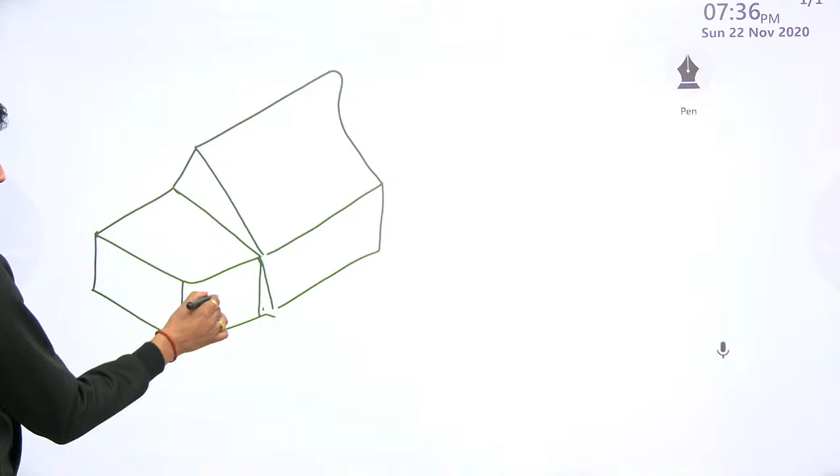Yes, this portion over here you call as side flank. This is your side flank, and this portion you call as end flank. This surface is what we call as rake face. This is the basic that all of you know. This is what is called as shank. Shank is the main body of the cutting tool, which is used to be held onto the tool post.

Now if you look at this tool, let us say this point over here is 0, this point there is 1, and this point over here is 2. 0-1 and 0-2 both are cutting edges. What are 0-1 and 0-2? Cutting edges.

During machining, let us say we are doing turning. So during turning operation, this whole thing is going to appear something like this. Let me choose the workpiece in some other color. I'll take red one. So let us say this is your workpiece which you are machining, you are turning basically, and then we have the tool here.

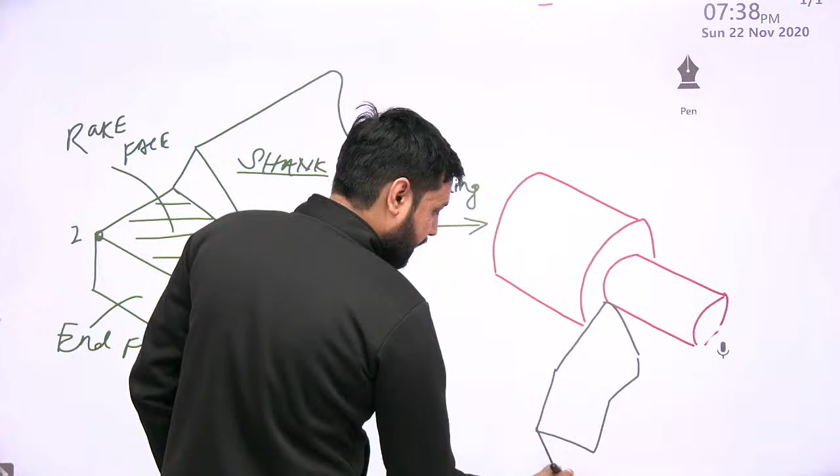Let me again choose another color. That color was this one. Let us see this one. Okay, so this is your tool, with the help of which you are machining the workpiece. So what happens, this workpiece rotates and you feed this tool.

Same tool is there. If you look at this point 0, then that point 0 is here. If you look at point 1 here, that point 1 goes like here, and this is point number 2. So now forget the right hand side. Concentrate on this diagram on the left hand side.

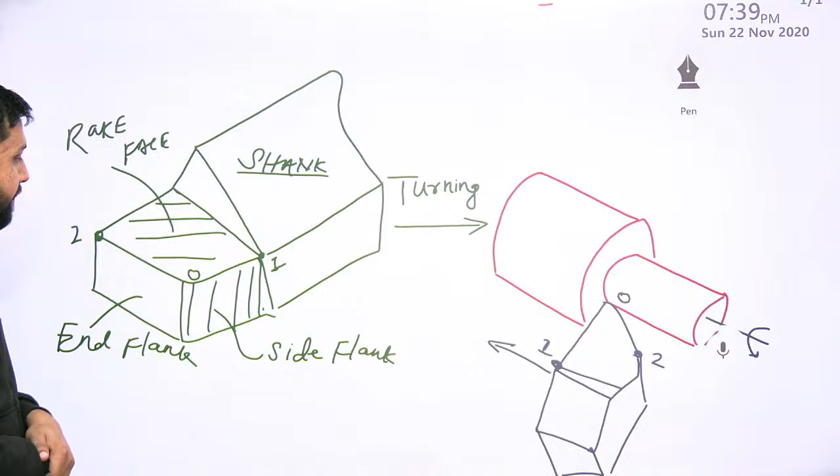0-1 and 0-2 both are cutting edges. If you look closely, you will understand 0-1 is at the side of the tool. So since 0-1 is at the side of the tool, we will call 0-1 the side cutting edge, and 0-2 is at the end of the tool. We will call it the end cutting edge.

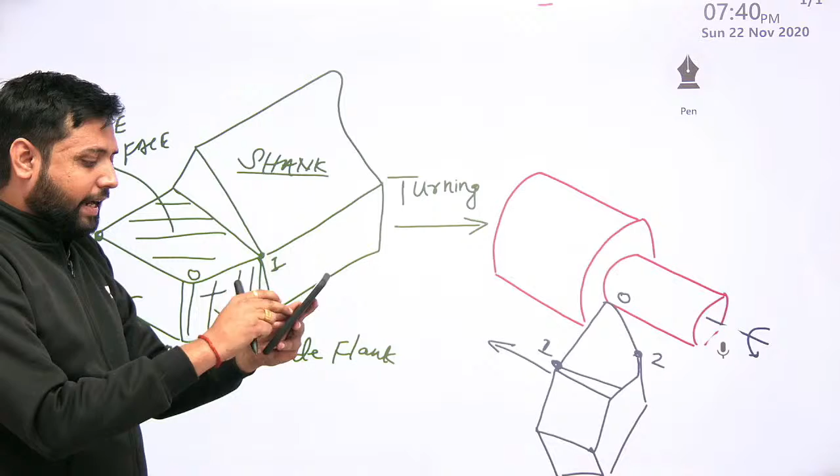Very simple to understand. And if you look at this diagram on the right hand side of the screen, 0-1 and 0-2: 0-1 is the side cutting edge, 0-2 is the end cutting edge. Primarily, out of 0-1 and 0-2, which one is in contact? Come into the live chat. Let me know, out of 0-1 and 0-2, which one is mainly machining the workpiece, mainly in contact with the workpiece?

Undoubtedly 0-1. So 0-1, which is the side cutting edge, is why it is also called the main cutting edge, primary cutting edge, principal cutting edge or major cutting edge.

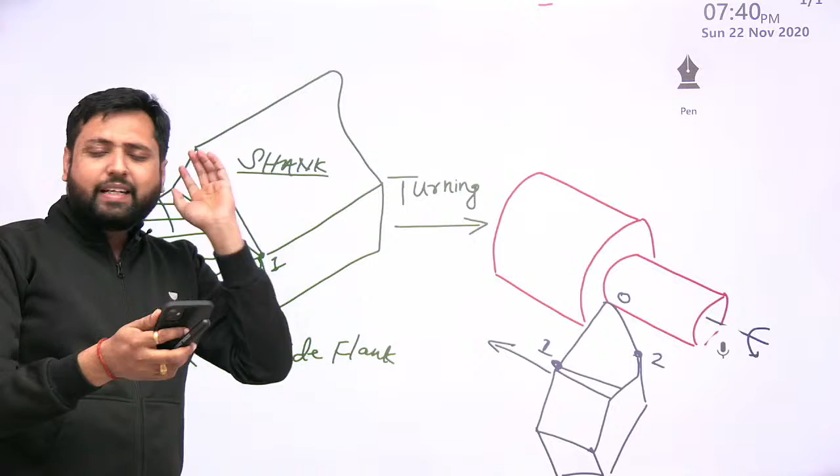What do you think? Is this end cutting edge in contact with the workpiece or not?

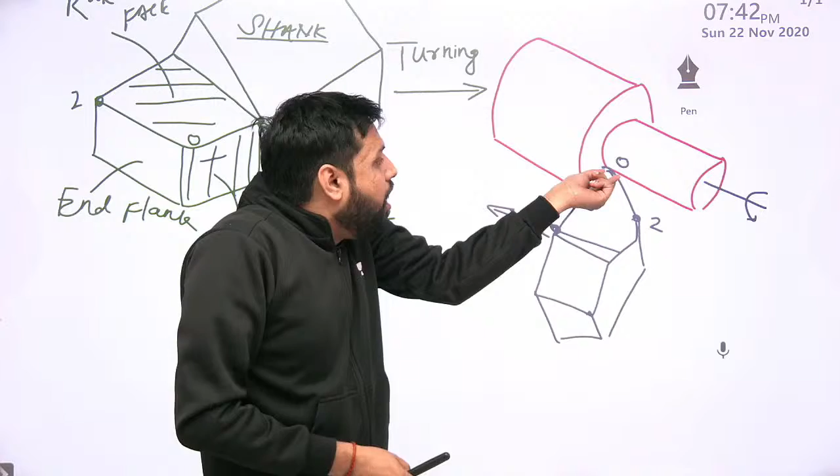This radius of curvature of the tip of the tool, which is also called the nose of the tool, is called the nose radius. And since you have made the provision of the nose radius, a small portion of the end cutting edge also comes in contact with the workpiece, but negligibly small. It has 2 cutting edges, but primarily only 1 cutting edge is machining the workpiece. So this is a single point cutting tool.

Now, my dear students, I defined 3 surfaces here in the tool. This was the rake face. This I told you is the side flank and this is the end flank. These two, one at the end and one over here, are both actually flank surfaces. This one is at the side of the tool, so side flank. This one is at the end of the tool, so end flank.

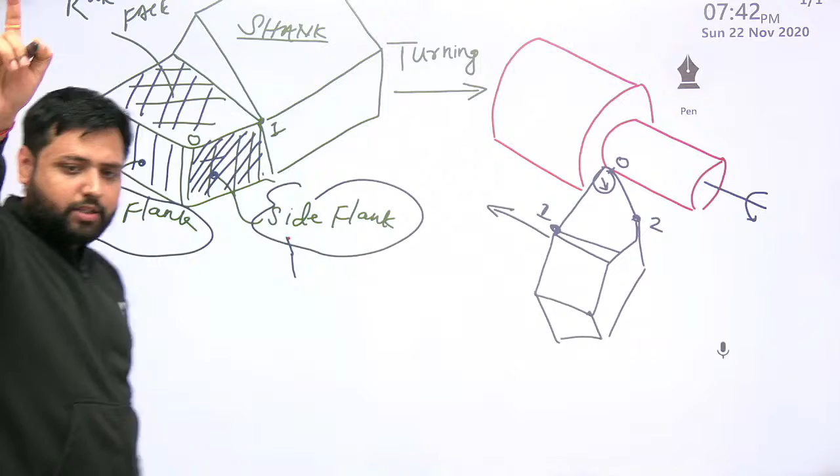Now, my dear students, if the machining has to happen effectively, efficiently, perfectly, then the chips which are coming out, look at this, the chips are coming out. I will show you the chips coming out from the workpiece here. Give me a minute. You see, chips are coming out.

As the chips are coming out from the workpiece during the machining, they will have a tendency to curl. It can curl in that direction as well as in this direction, like this.

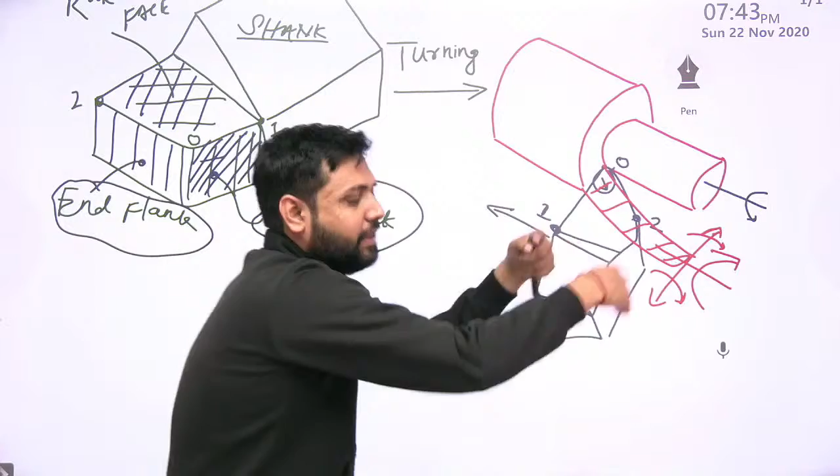Yes, dear student. Now, as it is curling, it may have a tendency to curl and enter in this gap. The gap you can see between the machined surface and below point 2. Below point 2, you have this end flank. That is not visible there, later on I will show you. But below point 2 the end flank is there, and this is nothing but the machined surface. So that chip can go and enter into that gap. That gap is very small.

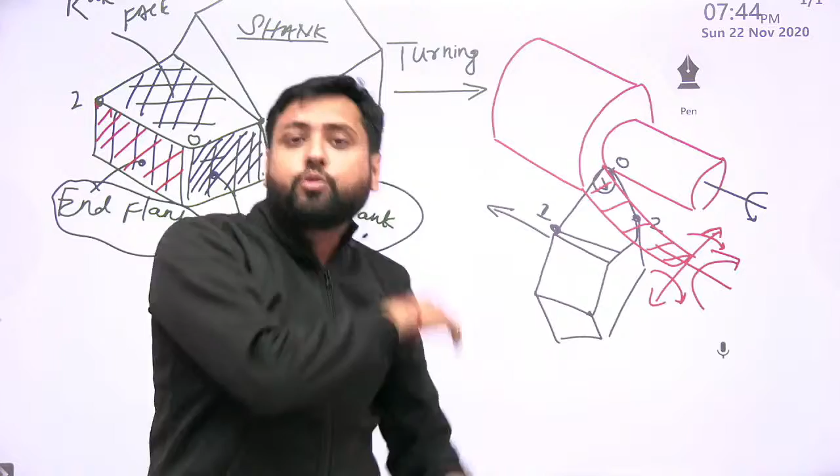If the chip enters, it will rub against the end flank of the tool. It will rub against the machined surface. What will be the result? It will deteriorate the surface finish. It will rub against the flank surface of the tool. It will reduce the tool life by wearing that end flank surface. That should not happen. So chips will curl, but it is our responsibility that we will make them flow away from the machining zone.

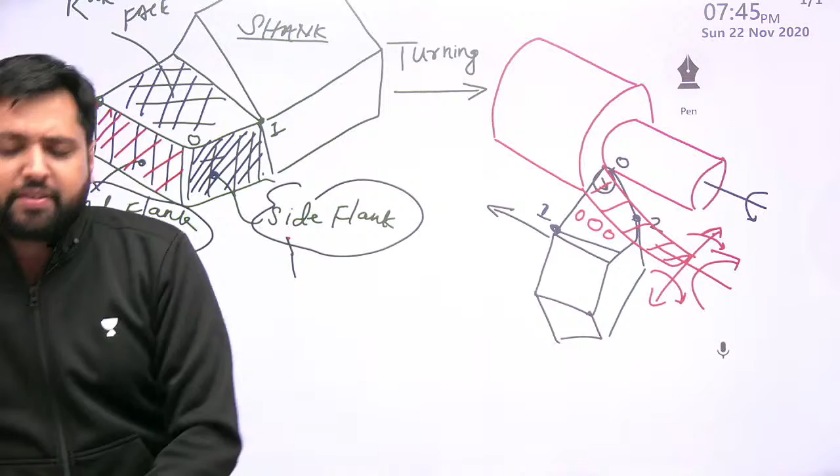Are you getting this? So that is the reason why this surface upon which the chip is flowing, which you can easily understand is the rake face, this rake face of the tool is given certain slopes, certain inclinations, so that the chips flow away from machining. That you will have to assure if you want to do the machining perfectly, efficiently and effectively.

Not only that, let me show you. Let me move it, or I'll just erase it. And I'll show you another diagram so that many other things will be clear to you. Basics are very important in metal cutting. Formula rat ke kuch nahi hoga. Basics are very important in metal cutting, my dear, because competition is increasing on a daily basis.

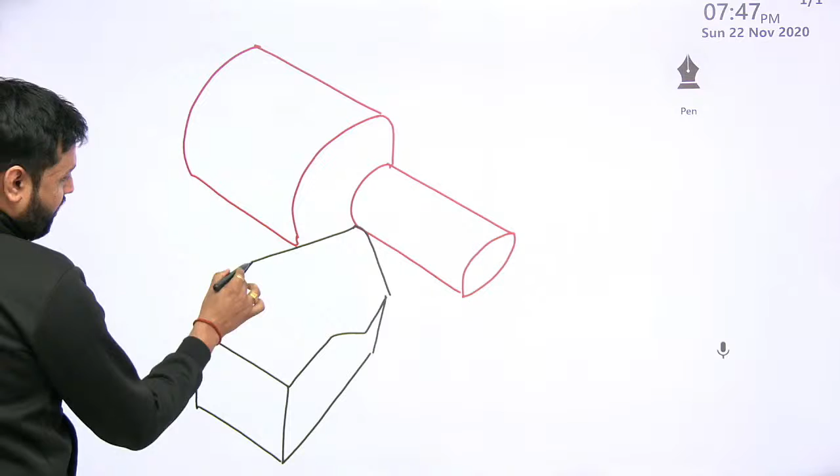Let us take the tool in a somewhat different color. Just a minute. This is your tool. Look at this beautiful tool. This is the beauty of metal cutting that you are looking at. Beauty must be appreciated. You must appreciate this beautiful diagram.

Right now, I am showing you the surface which is below point 1. Look at this 3-dimensional diagram. What is that surface? Side flank. What is that surface? Side flank.

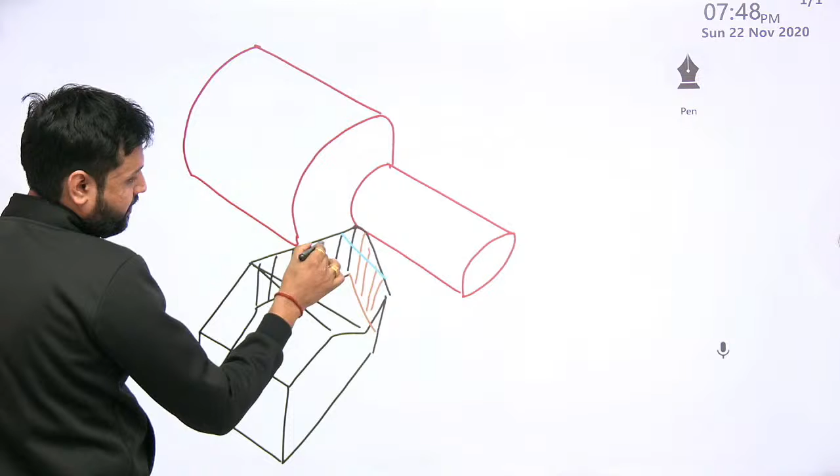Look at this surface. What is that? Down there, the vertical surface. End flank. And on the top, let us choose green color. This surface on the top is your rake face. Down there, black color, side flank. Orange color, end flank. And on top, green color, your rake face. The rake face was sloped, given certain inclinations, to assure that the chips flow away from the machining zone.

But not only that, my dear students. The side flank and the end flank, the black one and the orange one, also need to be given certain inclinations, certain slopes.

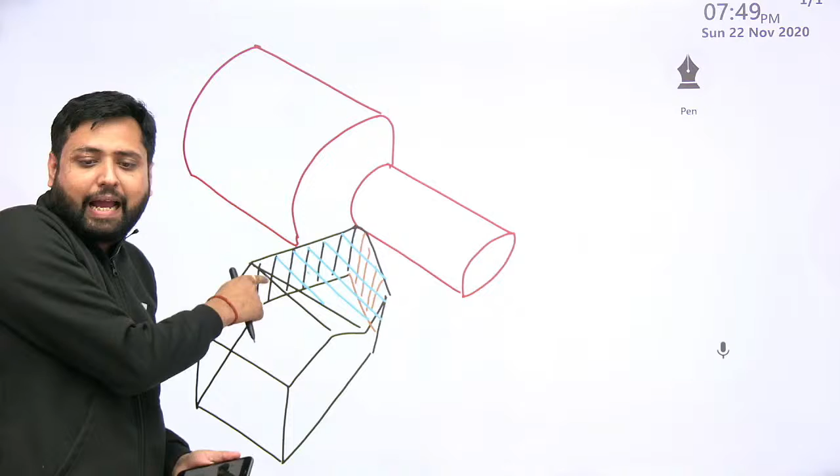Undoubtedly, if you are doing machining, only the cutting edge should come in contact with the workpiece. Flank surfaces, that black color one and that orange color one, both these surfaces must be relieved from the workpiece. If they are not relieved from the workpiece, they will start rubbing against the workpiece. Very nice. I can see your answers there in the chat box. Very nice. Yes, to avoid rubbing, these surfaces should also be given certain number of slopes.

So by now it is clear that to assure that the machining happens effectively, efficiently, chips must flow away from the machining zone. Only the cutting edge should be exposed to the workpiece, and there must not be any contact between tool and workpiece along the flank surfaces. And to assure that, what are we doing? We are sloping, we are inclining all the surfaces, whether rake face, side flank or end flank,

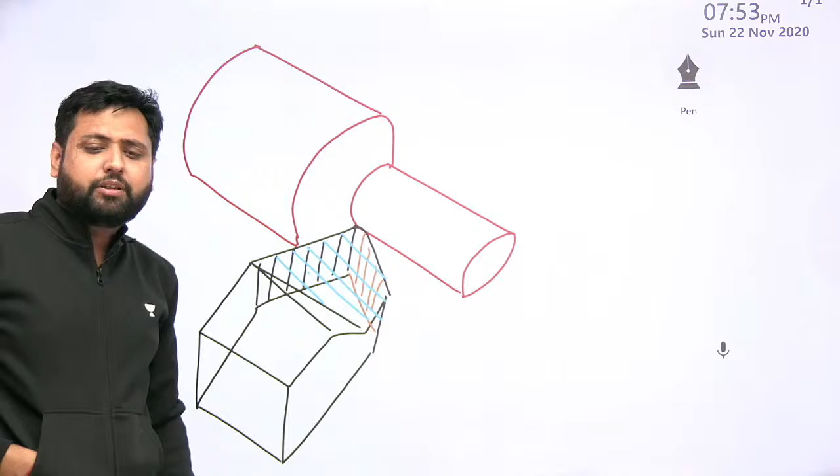How many surfaces are there? 3 surfaces are there. Every single surface can be given 2 slopes. So in total 3 surfaces, every surface can be given 2 slopes. How many different angles will be there? Undoubtedly 3 surfaces, each of the surface can be given maximum 2 slopes, so maximum number of angles total will be 6.

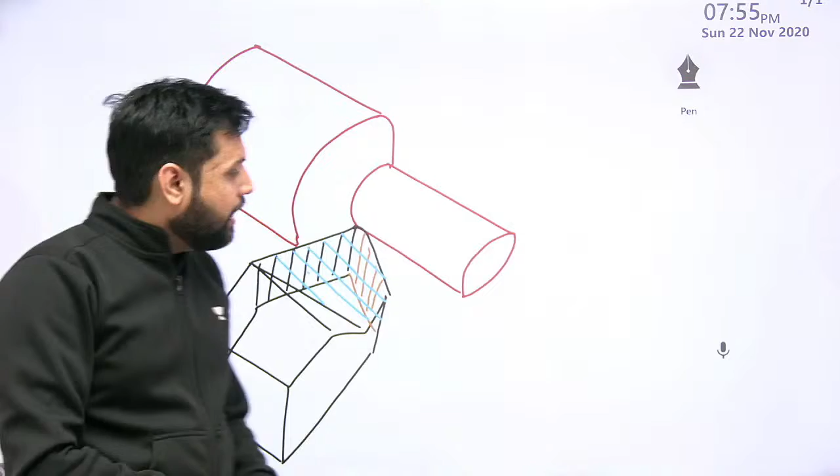Now comes that you know that there is tool signature, 7 components, and as I think most of you somewhere studied, there are different types of tool signature systems.

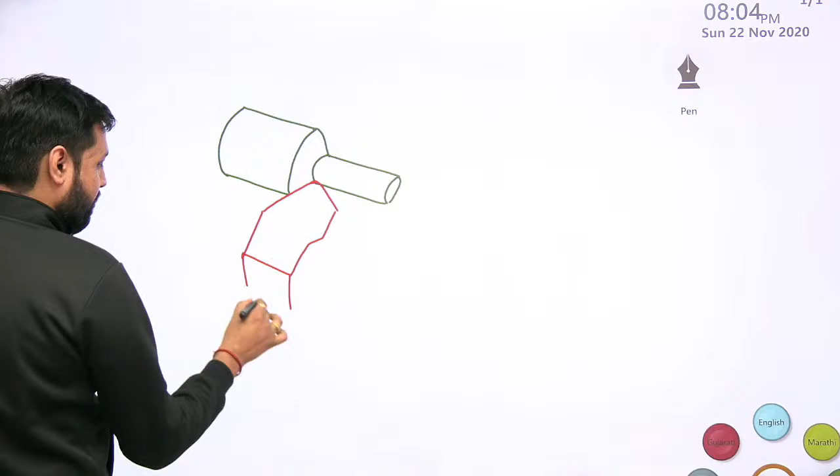Yes, and especially that beauty gets enhanced when it is explained by Mr. Rajeev Singh, who is the plus educator on Unacademy platform.

Yes, let me choose another color. This is a workpiece, this is a tool. Now, let us look at this. This is your machine.

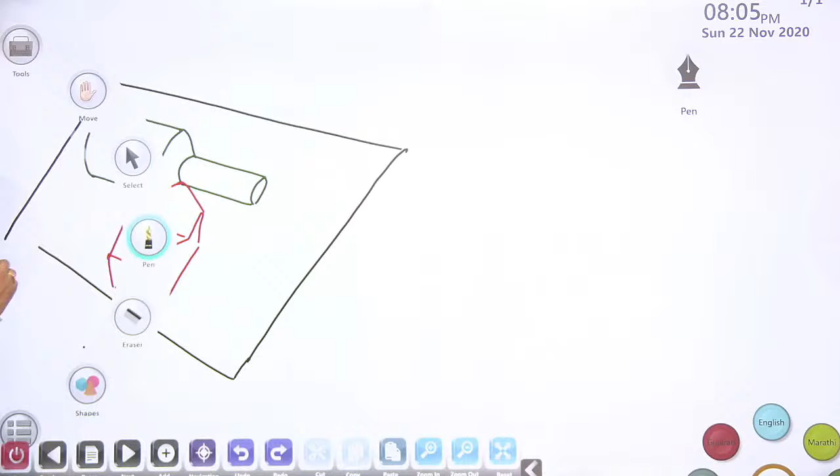Let me take another page itself. Leave it, otherwise you keep playing. This is our workpiece. This is your tool.

And here, let us say, we have this machine. It will not let me explain this interface, I think. But hold on. I will reduce the magnification. Is it magnified? Zoom out, zoom in, zoom out, zoom out.

Yes. Oh, thanks, dear. Thanks a lot. You are great, man. Thanks a lot. Chalo. You found the problem, right?

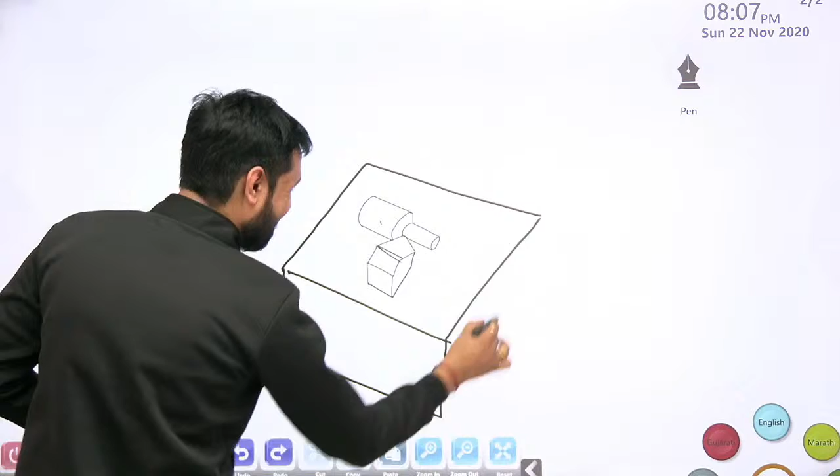What was going on? Let me zoom it further out. Oh, great. That's looking great. This is your machine. Is it visible to you now? Because I have zoomed it out. This side is headstock. This side is tailstock. Yes, this side, this is headstock. This side, this is your tailstock.

Now, here there is a line joining the headstock and the tailstock. And you know what line is that? This is that line joining this headstock with tailstock. Let us say that line joining headstock and tailstock, this red color one, is your x-axis.

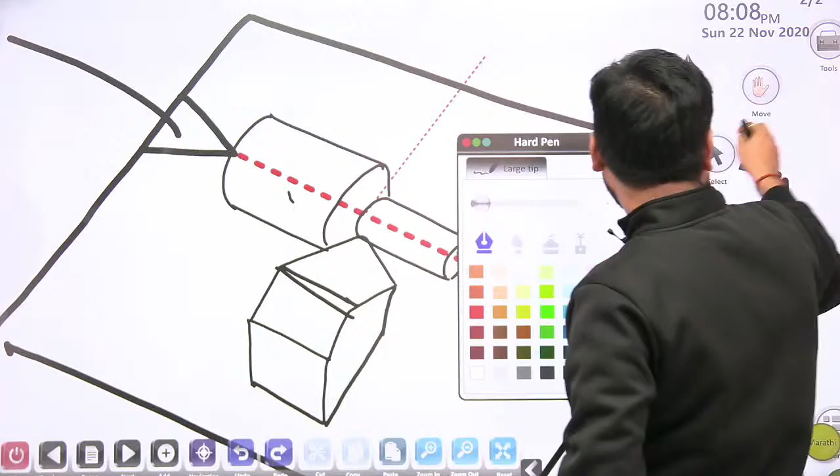Then perpendicular to that, we have another one, that is your y-axis. And where is that? Let me say here. This is your y-axis. Fine. And then we have another axis here, that is your z-axis. Let me show that as well. Let me take the shapes, that will look beautiful. Yes, here this is your z-axis. Yes, here somewhere there. Great.

And thanks, Global. Awesome. You are one of my previous students from ABD. ABD means, is it Abbots? ABD, I think Ahmedabad. Oh, sorry, Ahmedabad. Okay, got it, got it.

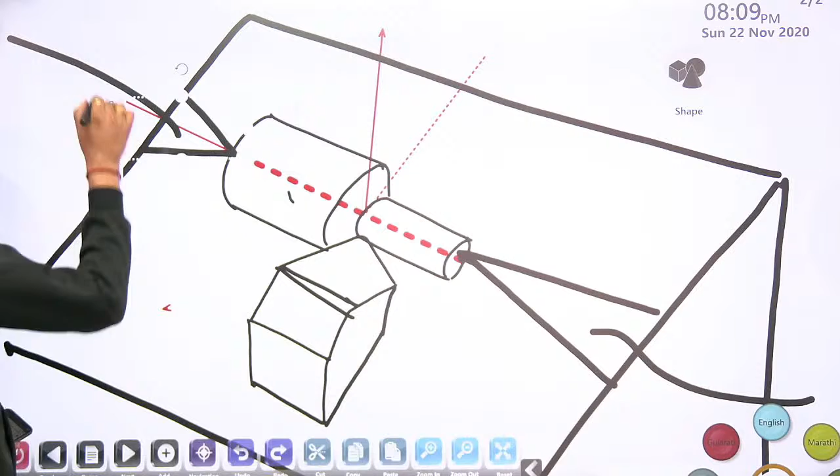So this is your x-axis here. I'm sorry. Undo. Yes, here it is your x-axis, and there we have the y-axis, and this I told is the z-axis. Now let me take the pen. I am actually using this interface for the very first time. So see, this is your x-axis, this is your y-axis, and this is your z-axis. Yes, and these are the axes of the machine.

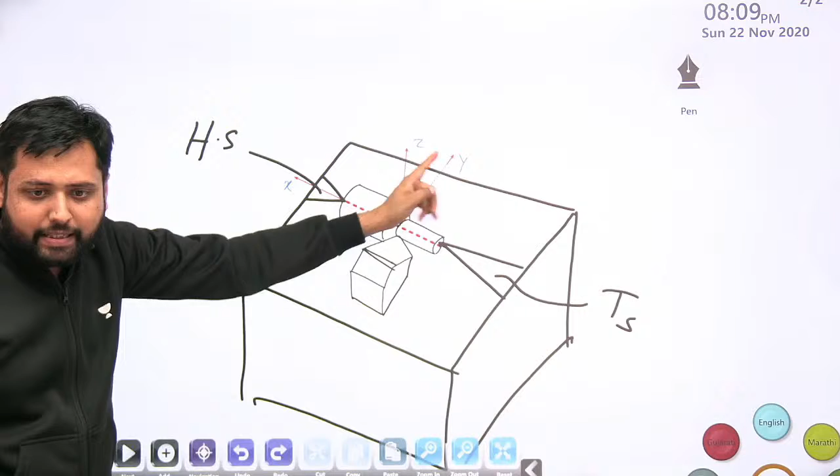Look at this. Let me zoom it out. Tailstock, headstock joining, x-axis; perpendicular to that, y-axis; and perpendicular to both of them is your z-axis. Now let me zoom in further. Great. Now look at this. We have a few planes here. Let me show you. Keep in mind that these are the axes of the machine. Let me show you the planes here. I will have to take care of the colors, then only it will be better visible to you.

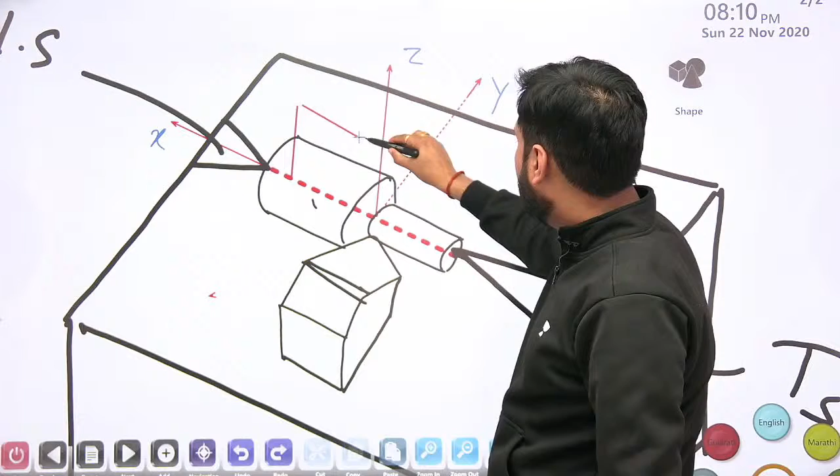Yes, here we have this plane, and its orientation is along, undoubtedly, the x-axis. Look at this plane. Its orientation is along x-axis. There is another plane that we have here. Let me change the color, then only you will be able to visualize it in a better way. Just a minute. I have to be very cautious while choosing the color, because a few colors don't appear that well.

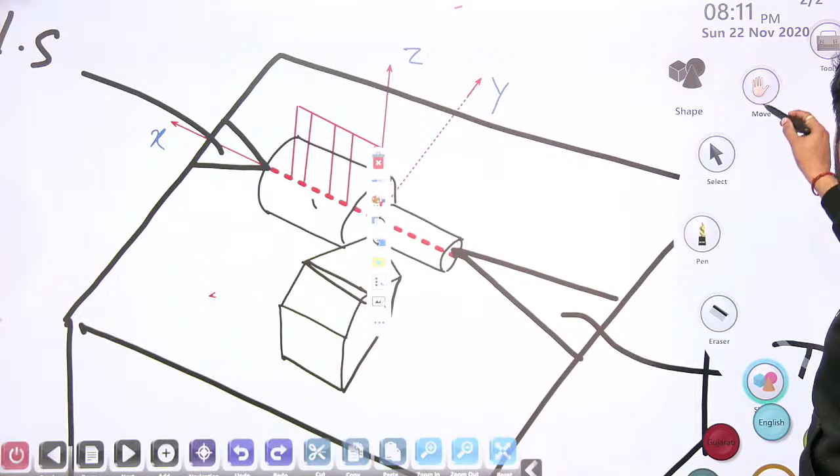Okay, there is another plane. Oh, still it is red. Why? Just a minute, hold on. And now comes the shapes. This one. Just a minute, I got it. Shapes and color. Yes, from here I take. This is the other plane. Look at that plane. Its orientation is along y-axis.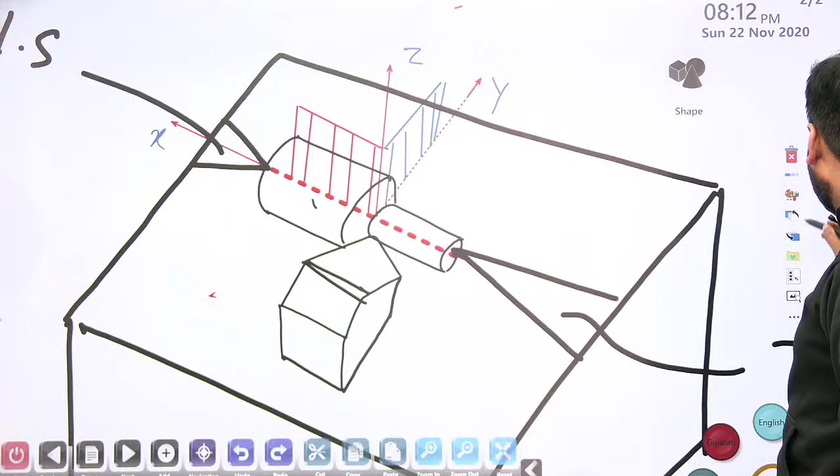And then we have another plane here. Look at this plane. This one. Look at this plane, look at that plane, and look at that plane as well. Now let me take the pen. Shapes ka tension khatam.

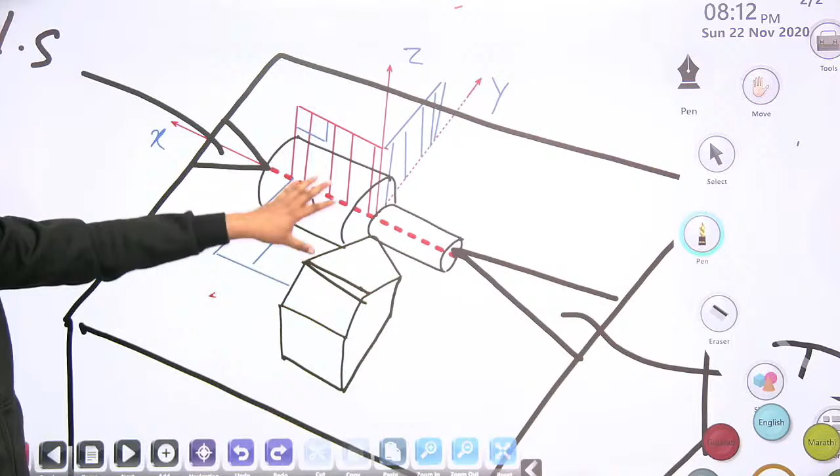If x, y, and z are the axes of the machine, then undoubtedly the planes drawn with the help of these axes will be the planes of the machine. Now, this red plane here has its orientation along the x-axis. So that plane we identify as the pi x plane, and we name it the longitudinal plane, because it is in the longitudinal direction.

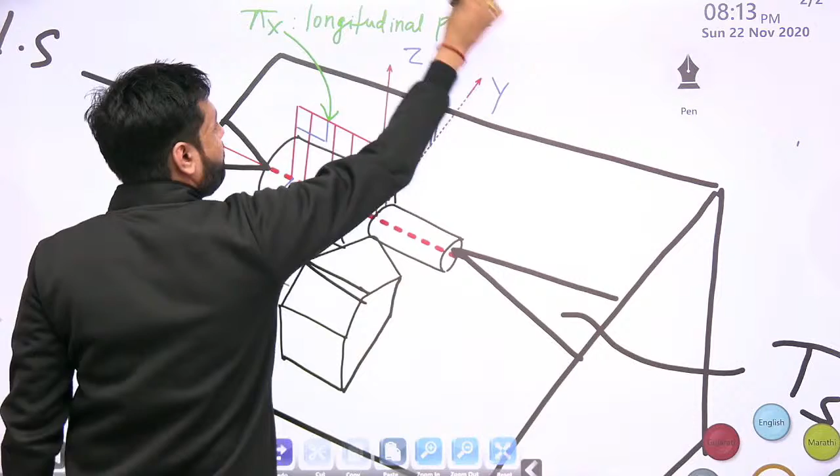And then this blue color plane, look at this plane. This plane we name the pi y plane, because its orientation is along pi y, along the transverse direction. So we name it the transverse plane.

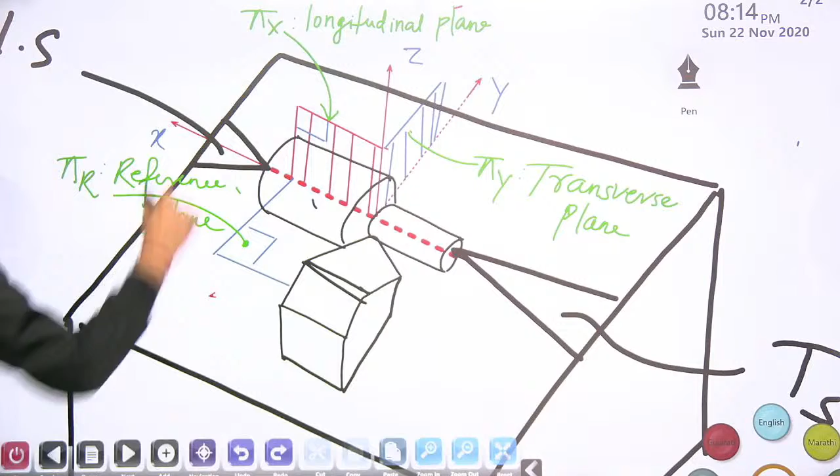Yes, this is the basic thing that you need to understand if you want to solve all the questions, whichever question they ask. And this plane over here, you look at that plane, this is what we call pi r. Pi r stands for reference plane. Okay, so these planes: red color one longitudinal plane, blue color one transverse plane, and down here this horizontal plane is the reference plane. Now look at this tool carefully.

Look at this tool further very much carefully. You know what surface is that? Side flank. Yes. And what surface is this? Let me show you with another color. What surface is this? End flank. And on the top, let me show you with another color. What surface is this one? Here. What surface is this? Rake face. Yes, red color one is the rake face, this green color one is the side flank, and the purple one is the end flank.

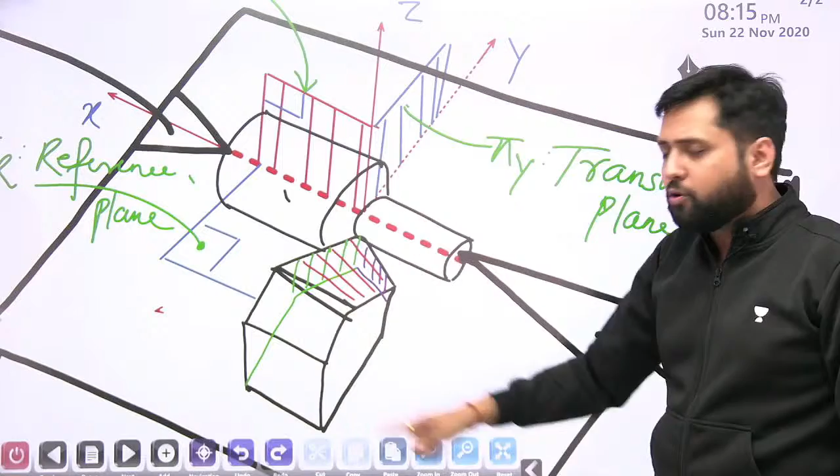And you know, you have sloped them so that chips flow away from the machining zone, so that the flank surfaces do not come in contact with the workpiece, right? Now my dear student, the side flank, if you slope it, look at this diagram, you will slope it towards me or away from me? Undoubtedly towards me. Then only it will not rub against the workpiece surface. The end flank, in which direction? Slope towards yourself. Yes, if you slope it towards the machined surface, it will start rubbing with the machined surface, right? Yes.

So there are these slopes, and if the angles are there, tell me approximately what angle? What is the angle of the line or plane that I have drawn? Few of you may say 20 degree, 25 degree, 30, 40, 45 degree, anything. But that will not be correct until you ask me, sir, with respect to what? With respect to this it might be 40 degree, and with respect to that, this will become 90 degree. So whenever you measure some angle, you measure it with respect to a plane. That is one thing.

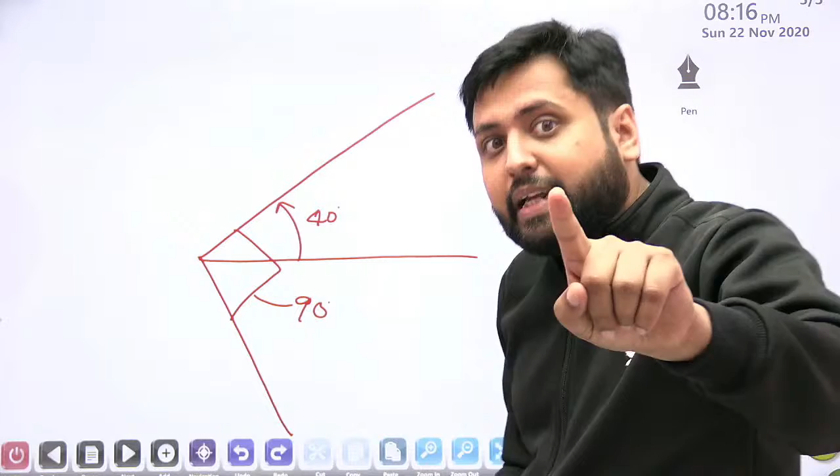The another important thing is, in which plane are you measuring this angle? This 40 degree, undoubtedly you are measuring it with respect to this plane. But in which plane? This angle is being measured in the plane of this smart board. This 90 degree angle is being measured in which plane? The plane of this white screen. Isn't it, my dear student?

Yes. So both of these things are very important, and especially while understanding the tool angles, the second one becomes very much important: in which plane are you measuring? That is the game due to which there are different types of tool signature systems. So whenever you measure some angle, you measure it with respect to some plane and into some plane.

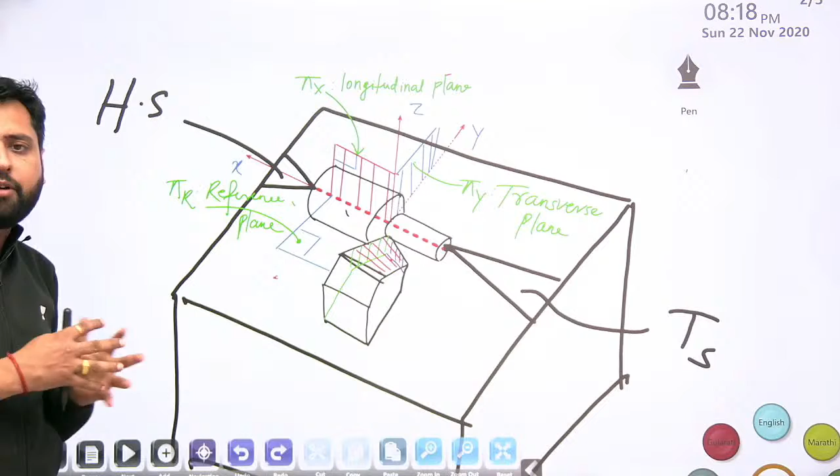Now listen, my dear students. Look at this. Here these are the three planes: reference plane, longitudinal plane, and the transverse plane. Now, listen to me carefully. All these three surfaces, rake face, side flank and end flank, have certain inclinations, certain slopes. Those inclinations will be measured with respect to some plane, and in some plane.

In the ASA system, those angles of the three surfaces are measured with respect to and in any one of these planes: reference plane, longitudinal plane, transverse plane. And these are the planes of the machine. That's why it is said that the ASA tool signature system is based on the machine reference system. Is it clear to all of you?

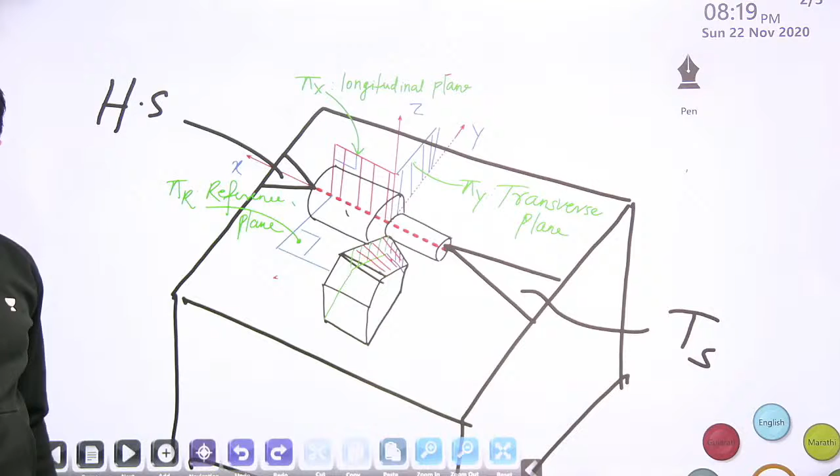Now, come back. Let us bring all these planes onto the cutting edge of the tool. That's what I am going to do. Look at this. Let me add a new slide, and there I will bring all these planes to the cutting edge of the tool, and then you will understand the whole ASA tool signature. You see, this is your tool. Okay, later on I will erase them, don't worry. This is your tool.

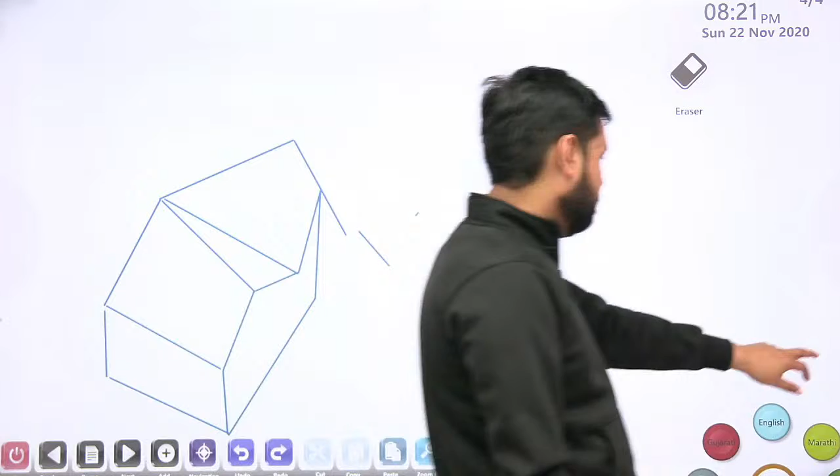Eraser has to work. Oof. Let me cut it. Cut option is not there. Hold on.

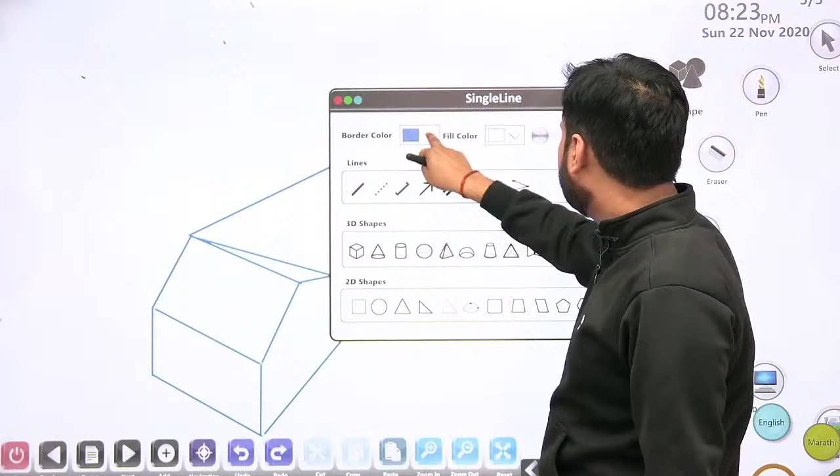Okay, this is your tool. Let us say. Now dear, we have few planes here. Yes, those planes are three planes that I had shown you earlier. Those three planes are, one was the red color plane in the x-axis direction. Yes, let us say this is the x-axis direction.

So here there is a plane. There is the z-axis. Then we have the y-axis as well here. Yes, come on. So there is the plane. This plane is the longitudinal plane. Yes, this plane here is the longitudinal plane, pi x.

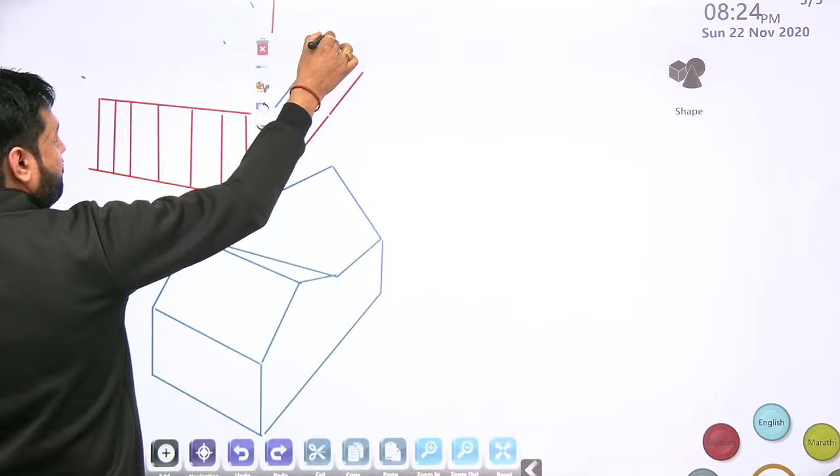And there is another plane. Let me choose another color for that. There is another plane. Yes, and let me extend this as well. Here in this direction. Okay, we have this plane here extending in this direction like this.

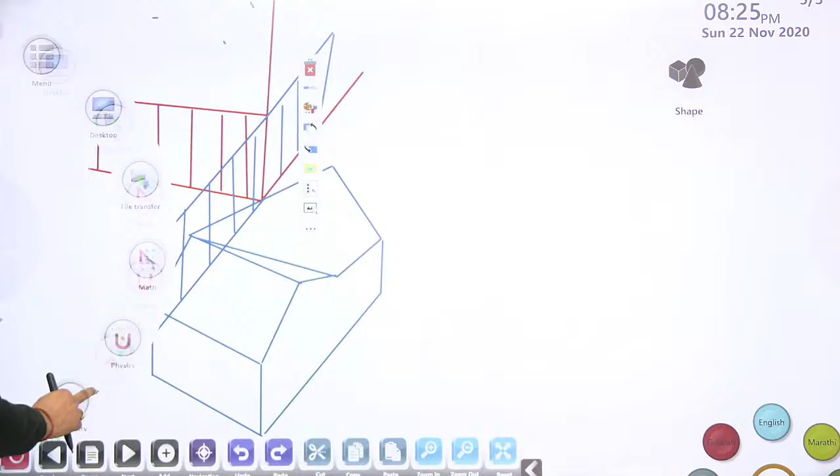Okay, this is the plane. Yes, I hope it is clearly visible to you. Yes, it is. And then we have another plane here. Where did it go? Here. Here, yes. We have another plane here.

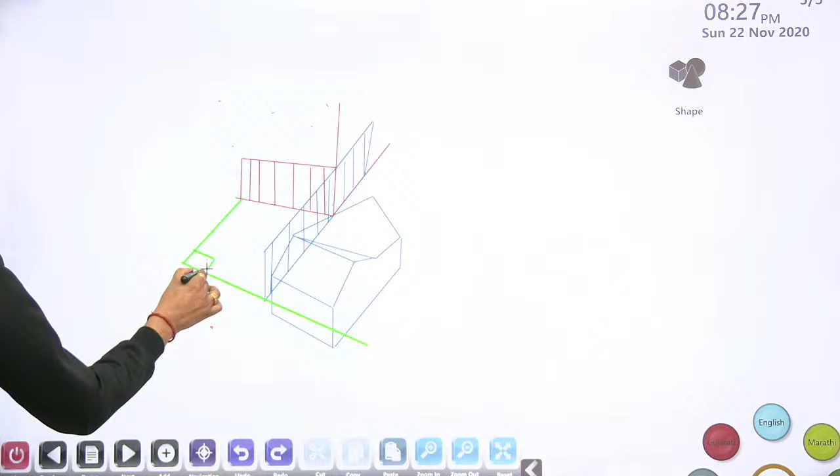Zoom out this. Yes, there is another plane here. This one. Three planes are there. Yes. This is your reference plane.

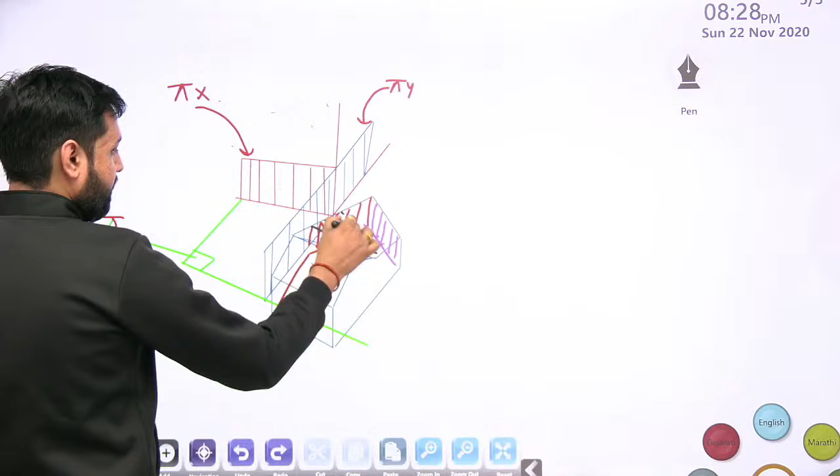We are going to measure the inclinations of all these surfaces. Black color one rake face, purple color one end flank and side flank, with these three planes, which are pi x, pi y and pi r. Yes, remember this. What I have done is I have already explained.

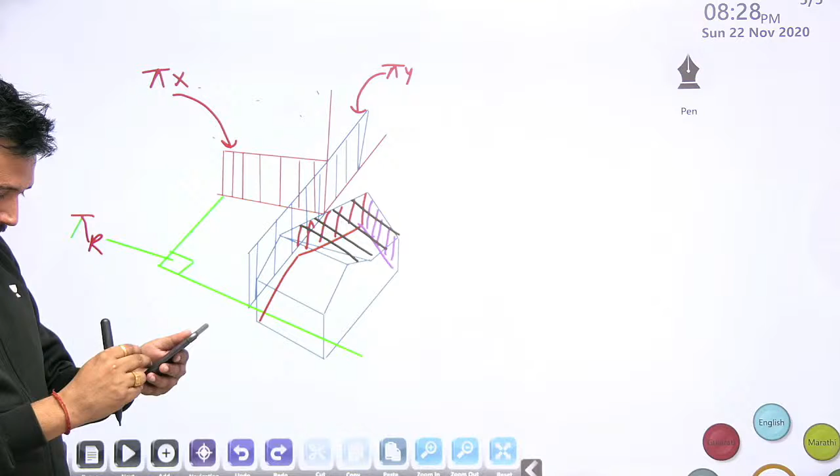Right now I am in Patna. Okay, Ravi Raj has already completed casting, forming, welding, machining from my lectures. Hi guys and good evening sir. Yeah, good evening to all of you. I didn't see the comments for long hours. Let me see what is going on. Jhama Jham is going on. Great. Ravi Raj complete. Ravi Raj, you can WhatsApp me, yeah? Okay. You are from India, Darjeeling. Stay well because it's winter time, right?

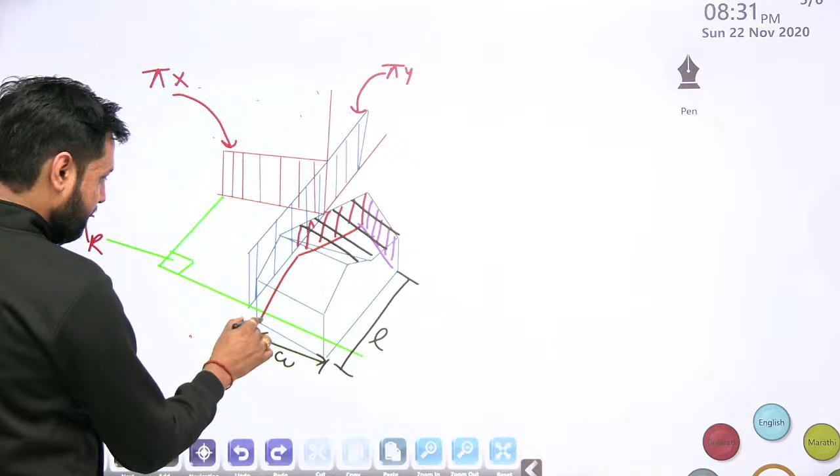Now come to the next diagram here. This is the width of the tool, this is the length of the tool, and down there we have this as the base of the tool.

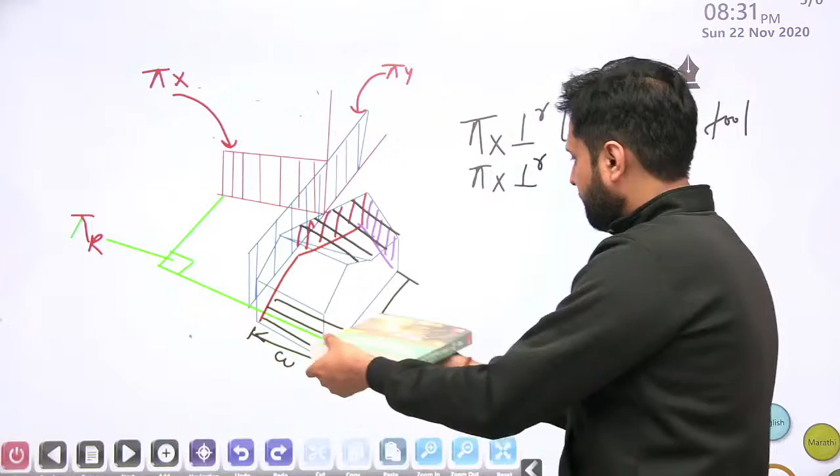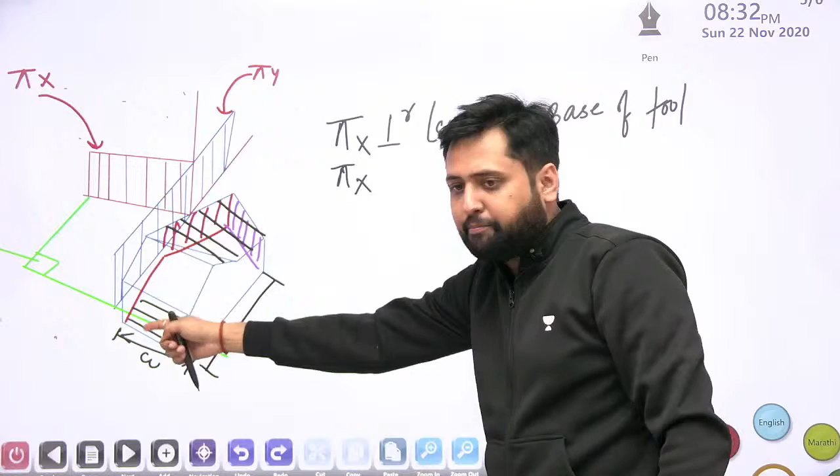Yes, so pi x is not only perpendicular to the length of the tool, but it is also perpendicular to length and base of the tool. Yes, then if you look at pi x plane, it is parallel to the width of the tool. Yes, pi x plane is parallel to the width of the tool.

Second thing, understand pi y. Look at pi y. What is pi y? This one is pi y, right? Pi y is perpendicular to width of the tool. Pi y is perpendicular to the width of the tool as well as perpendicular to the base of the tool.

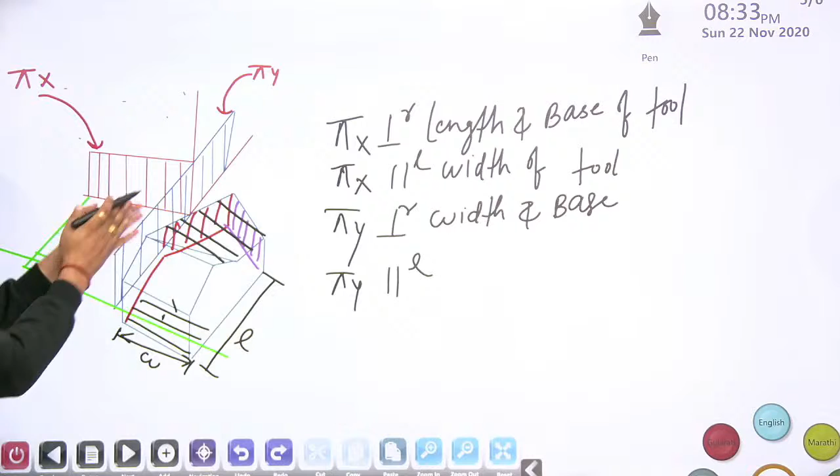Yes, pi y is perpendicular to both width and base of the tool. Yes, and pi y is also parallel to length of the tool. Yes, now I am just about to give you the Brahmastra.

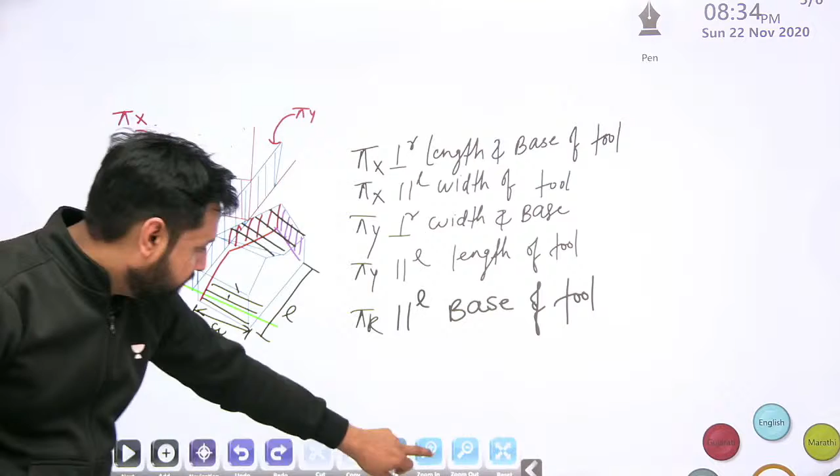Pi r, this is the reference plane, pi r. Let me zoom it out. This is the reference plane. Yes, pi r. This pi r is like parallel to base of the tool. Now, dear students, this you understood very well. Let me move to the next slide here and just hold on.

What angles do we have? ASA angles. The ASA angles that we have are alpha B, back rake angle, side rake angle, end relief angle, side relief angle, end cutting edge angle, and side cutting edge angle. Right, dear students?

These are the angles. Now, if these angles are there, undoubtedly they will be measured with respect to some plane, and not only that, they are being measured in some plane. That's what you need to understand, and that's what you need to even remember, my dear students.

You see, these are the angles measured with respect to and measured in. That's what we have to understand and remember. To understand, you can go to YouTube and search ASA tool signature part 1, part 2, part 3, part 4, part 5, Rajeev Singh, and you will get it. I have explained it beautifully over there. I will not waste the time over here. I'll just give you the direct Brahmastra.

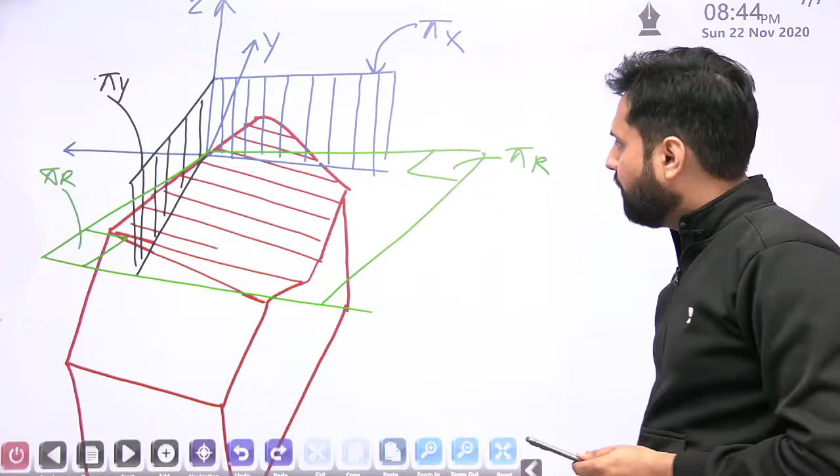in backward direction, how much is this angle? Let me show you. In backward direction, if you measure, how much is the angle? You see, this is the angle in the backward direction. Which color will be suitable there? I think this will be visible to you. Yes, I think this will be visible to you. You see,

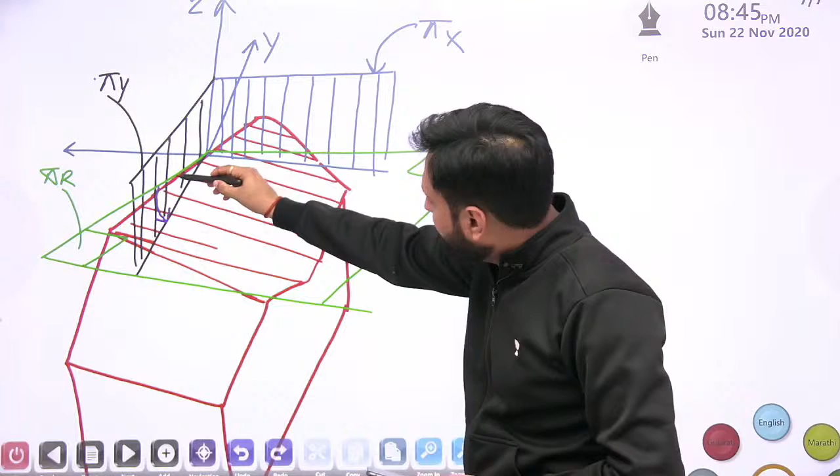This angle from here to here, this angle is what we call as back rake angle. Now, back rake angle is being measured with respect to which plane? You see, pi r plane. And this measurement that you are doing, that measurement is being done in which plane? You see, in this black color plane, that is pi y plane. Did you understand? With respect to pi r, in pi y. Yes, my dear.

So that is why I wrote here, look at this, back rake angle is measured with respect to reference plane and in pi y plane. Okay? Or in words, how do we define this back rake angle? It is the angle of inclination of the rake face measured with respect to a plane which is parallel to the base of the tool, and it is measured in a plane which is parallel to the length of the tool but perpendicular to the base and width of the tool. Did you understand anything? No.

You know what did I say? Now let me tell you this slowly. Listen to me carefully. I told you that back rake angle is the angle of inclination measured with respect to a plane which is parallel to the base of the tool, and it is measured in a plane which is parallel to the length of the tool but perpendicular to the width and base of the tool. That is what I said to you.

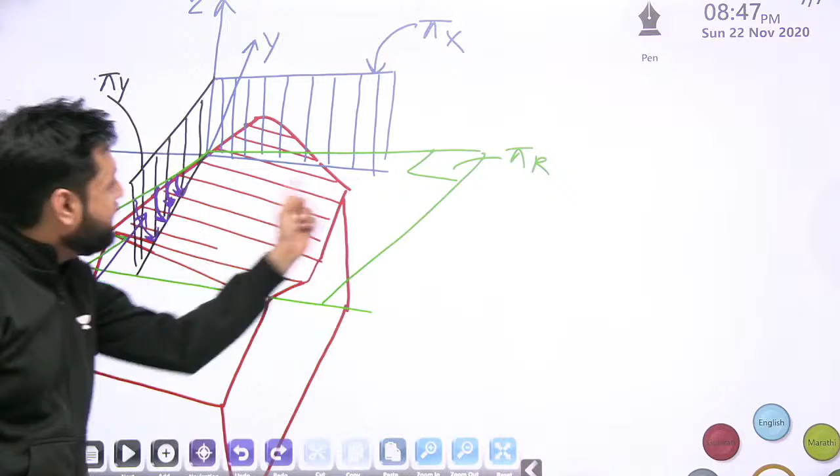So if you try to remember this in words, you will never be able to do that. But if you understand this along with this, then you can easily remember. Though if you don't understand, then I will give you a trick. This is how all the angles are defined. You see, the rake face in this direction is having the sideward inclination, so that angle will be your side rake angle.

That angle is measured with respect to which plane? This from here to there, this is the angle. This angle is showing you the sideward slope of the rake face with respect to what? Reference plane, pi r. That's what I wrote here, with respect to pi r, reference plane.

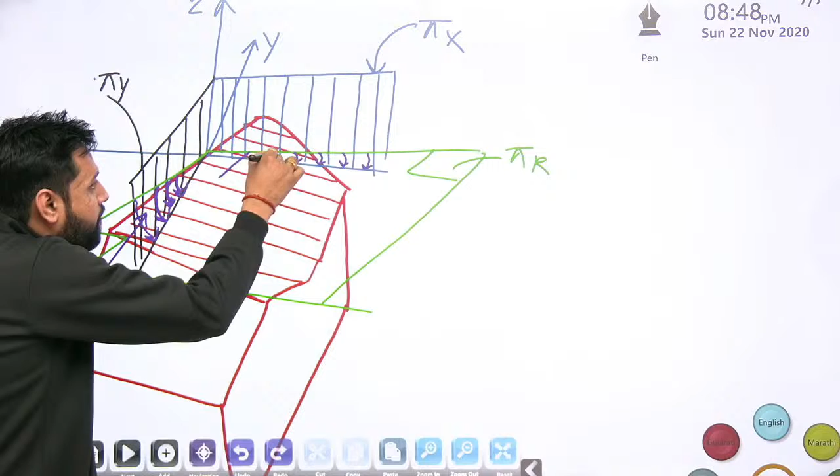And this measurement that you are doing, from here up to this angle, in which plane? Undoubtedly you are doing this in the pi x plane. That's why I wrote here that this angle is measured with respect to reference plane, but it is being measured in the pi x plane. Very much clear to you? And all the other angles are defined in this way only.

Yes, you'll be thinking, how did you write all these things so fast? I didn't understand anything. You need not understand. Don't worry. Just be happy and listen to me, my dear.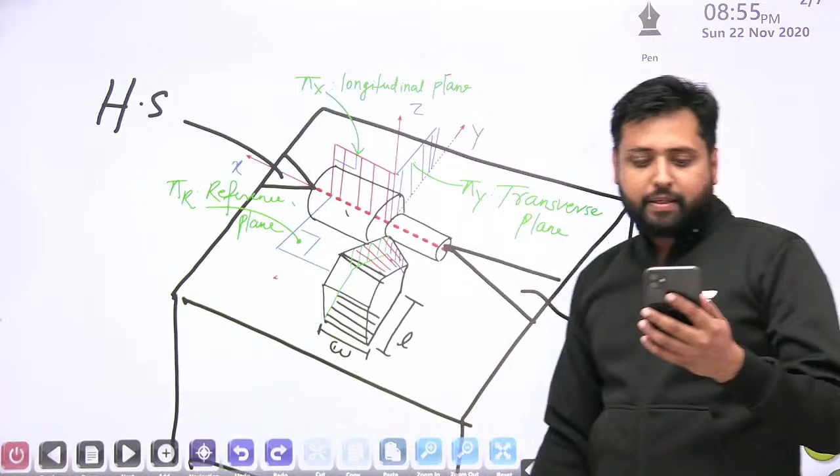Every day I will be taking these lessons and I'll try to complete this whole metal cutting. Not only concept, very good questions, and I will guarantee you, except those questions, nothing will be asked in GATE. I'm not saying that the exact question will come. What I'm trying to say is, except those concepts, nothing will be asked from this chapter. That's my guarantee. But you will have to stay with me.